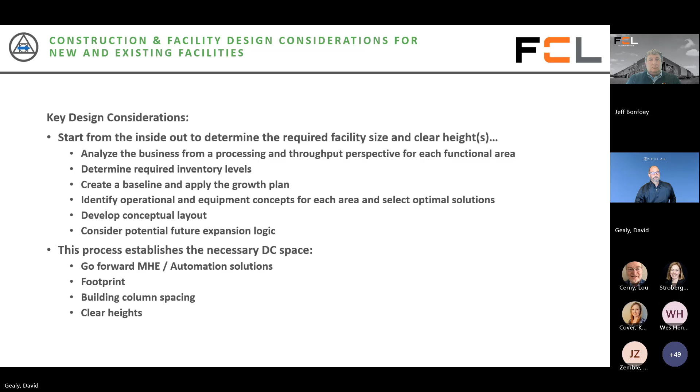From a building perspective, some of the things that need to be considered, working hand in hand with FCL as well, during the Under Armour project.

Key design considerations there, obviously the DC floors. Depending on the solutions that are selected and implemented, sometimes there's special consideration in terms of floor flatness and floor levelness that need to be taken into account. An example would be very narrow aisle, or VNA, high bay racking, oftentimes with order pickers for cases or turret trucks for pallets. And then also the point loads for the rack and how heavy the loads are going to be in the rack, doing those calculations to make sure the floor can withstand the loads being placed onto it.

Electrical—obviously there's a lot of electrical that goes into a building, no matter the size. There's lighting, convenience outlets, HVAC, everything you can think of. But from an MHE perspective, there are power requirements that need to be rolled into the overall building power requirements up front, to make sure the building has enough to support the entire facility.

Fire suppression—ESFR is the norm nowadays for ceiling heights up to 45 feet. There are some product commodities and hazardous materials that may require in-rack sprinklers, so those things need to be considered and rolled into the building design.

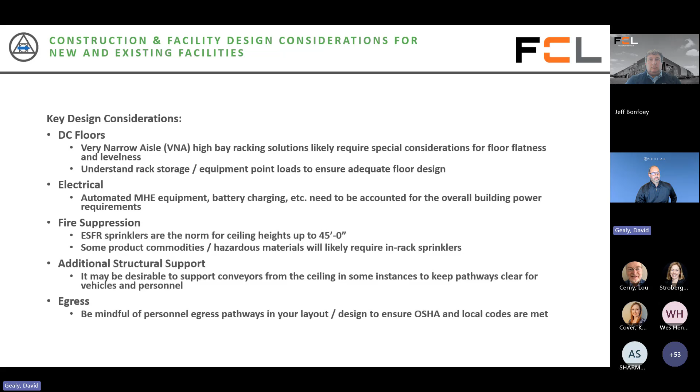There's obviously so much more that goes into this, but those are the five we've highlighted here. And with that, I will segue to Jeff to walk us through. Thanks, Dave—FCL and the case study.

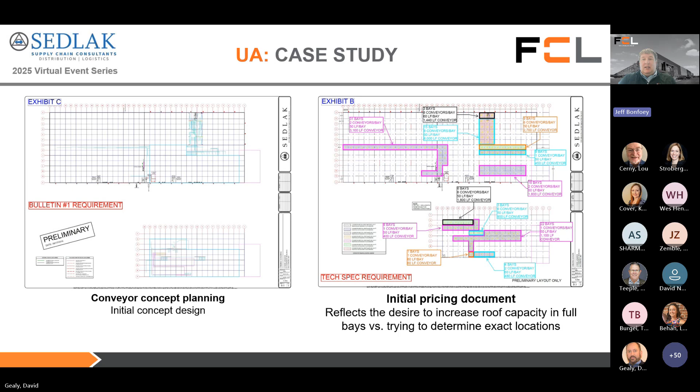But by and large, the premeditative thought process checked a huge box in enabling us to build the facility and not have to wait for all this to be done.

Any of the modifications we had to make, we were able to quickly make with little to no field modification in the building to accommodate this. Any field modification we had to make was done at a time within the building when there was dirty process work being done. It did not have to wait until the building was complete and the MHE was being installed, because you still had the full bay width in which to play with moving the stuff around.

I think this worked out tremendously. This project was, from initial shovel in the ground to turnover, I think around 14 months.

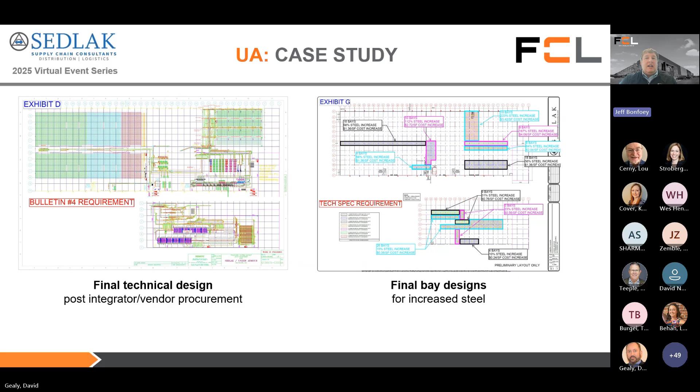So some of these overarching lessons learned, I'm hoping this is a microcosm of how we'd like to look at any one of our facilities as a partner: what creativity can we bring to the table to understand where folks are in their process, what portion of the project is fully designable today, and what portion we don't have enough inputs on yet.

What could we do to overcome those? So increasing the bay width allowed the base building to be constructed during the selection of the conveyance equipment. Increasing the steel in the base building versus a specific location helped eliminate rework in the field.

And it's dirty, you have to repaint it, you have to touch it up, you have to be careful what you're working over. It's not stuff we want to be doing inside a building that has MHE going in.

It allowed our overall communication with Sedlak and company to share all these ideas and coordinate, kind of up front, even if it was in the middle of the project. It was still upfront in terms of the overall critical path of the job to stay ahead, and I think that really, really helped.

So moving on, the second topic is sizing and design considerations. I think this came directly out of one of the comments or questions we had coming in leading into this webinar.

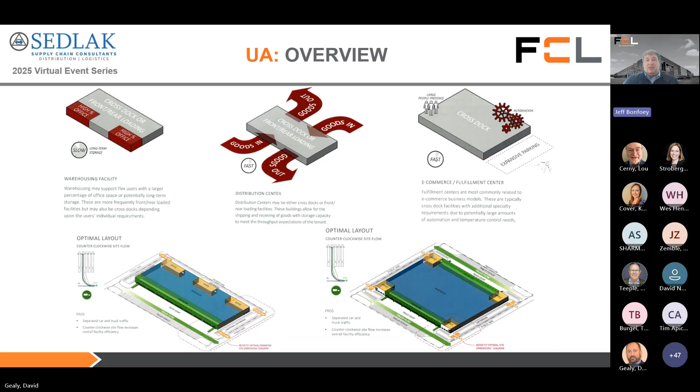If we go to the next slide, we've developed and helped assemble key elements and key attributes that relate to what the most efficient building size is. There are absolute places in the country where this changes depending on what the trailer size is. 53 footers are pretty standard, but there are places where those get longer, and then the truck courts start changing size.

Column spacing - we always look at what the column spacing is in the building, and there are absolute efficiencies when we're looking at a steel design of what those may look like. But if we're talking about pushing towards an e-commerce facility like UA, some of these things become the tail rather than the dog. The use in the building, the MHE equipment, starts driving some of these decisions, and some of this other stuff starts sitting on the side.

But if we're able to be at the table and have a discussion, we also like to think about generation 2 and generation 3 of this building. That's where we try to drag the discussion back into some conventional standards or what we've typically seen, because this tends to capture a much broader audience of potential tenants. If we build a building too specific to one particular company, it becomes harder to hear what that generation 2 or generation 3 might be. So some of the elements we've pulled together here become background guidance for us when comparing where the discussion is leading us.

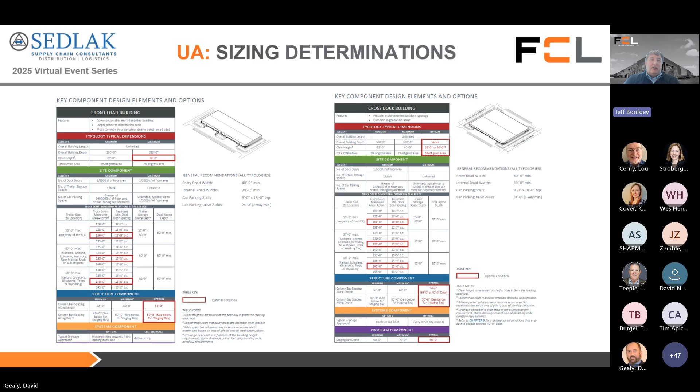There's a lot to unpack, but we talked on egress. Egress becomes a really big challenge and ultimately becomes the largest restraint on building width. Under Armour happens to be probably one of the widest buildings we've ever built - I think it was 670 feet wide. That posed really significant challenges in getting egress paths to work for getting people out of the building. For anybody who doesn't know, 400 feet tends to be the magic standard.

When you start getting close to that standard, you start to really get challenged, because any horizontal movement left or right eats up the travel distance really quick - trying to get down the staircase from a mezzanine structure. That really was one of the biggest challenges on Under Armour, the fact that there were mezzanine structures which also had to take into account the egress path. That becomes a real big challenge when you start looking at conveyance equipment and all that.

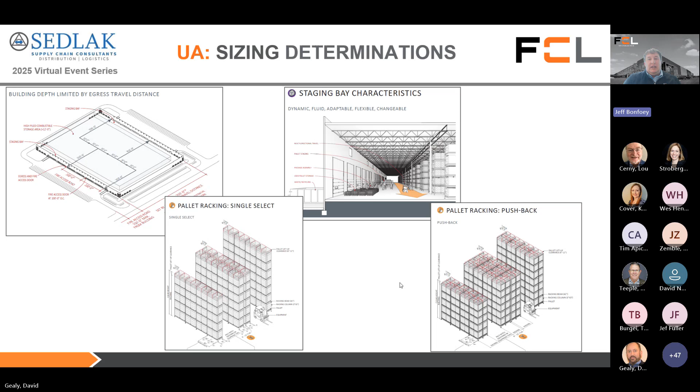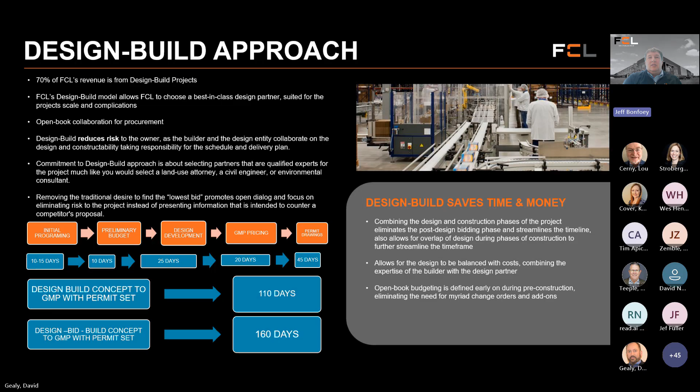Moving on to the final overarching topic that seems to come up, and was definitely heard in some of your comments that were sent in, it was tariffs. What I would say on this subject from our perspective is it's the big world of the unknown. It's changing on an everyday basis and it's really hard to predict. At times it feels like we're right back in the world of COVID.

But with all that uncertainty, all the unknown, all the unpredictability, what I would tell you so far is what we're seeing in our facilities is that the impact of tariffs has been somewhat negligible so far. The cost impact is being negated in some part due to some slowing of the overall industry on the distribution warehousing side.

I also think there's a lot of creativity that these suppliers are starting to utilize in an effort to maintain their competitiveness, even if they're having to absorb some dollars or it's costing them some dollars in tariffs. So far there's some interesting ways we've heard folks importing products to different countries before they get imported to the U.S. to reduce tariff amounts, modifying the way they're procuring products, changing some sources of chemicals, changing the composition of chemicals going into the products. There's a lot of products actually made in the United States, despite the headlines you hear, but the tariff starts coming into the raw materials that need to be imported to the U.S. for them to produce. We're seeing and hearing how some of these guys are changing it.